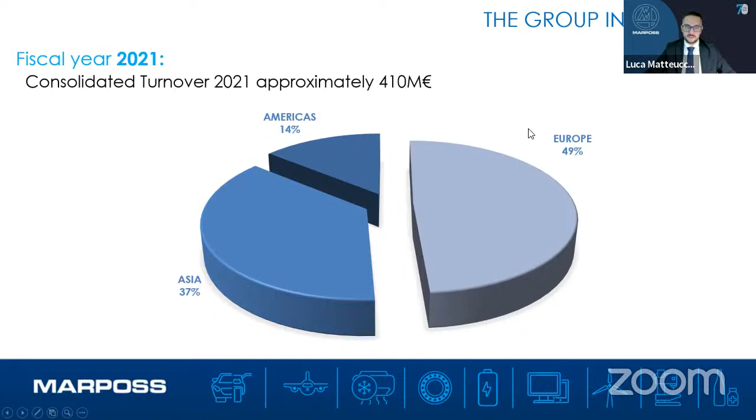How we are present worldwide, just to give an idea. The main sales and service organization centers are located in Germany, China, USA, Japan, and Italy, while the main manufacturing plants are in Italy, China, Germany, USA, and France.

Who are our end users, so how is our market divided? More or less, Marposs Group is working with two big categories. One is the system integrators, where we are supplying our application to machine tool makers and gauge and fixture makers. The other segment is the end users, so that could be automotive, aerospace, biomedical, glass, energy, 3C, bearing, electric motors, and compressors. So as you can see, we are in a very wide spectrum of fields, of markets.

Going a little bit more in detail about our product range, we are starting from the application for machine tools: grinding and cutting, forming, and stamping machines. In the matter of in-process gauges and touch probes, we are discussing part measurement during mechanical machining. We are able to provide in-process gauges and touch probes, post-process gauges to verify and assess if after machining the part is in tolerance and in line with expectations, and plugs for interoperational and/or final inspection.

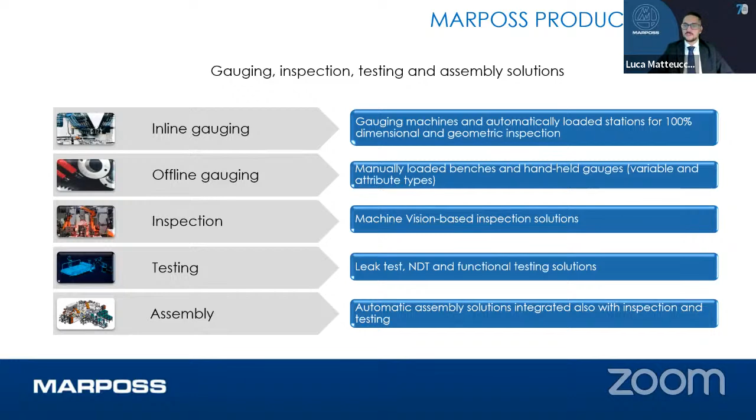We are also providing the testing. So what does testing mean? Leak test, non-destructive test, so NDT, and functional testing solutions. In the end, one of our latest and recent acquisitions gave us the opportunity also to enter the field of assembly, with automatic assembly solutions integrated also with inspection and testing.

Another important part of Marposs are the contact gauges, while my colleague later will give you a much wider and deeper presentation. Those could be electronic, air to electronic, or hard gauging; non-contact gauging, so shadow casting, reflectometer, interferometer, chromatic and confocal; vision systems with infrared and high resolution cameras; process monitoring, sensors and software, so position, force, vibration, and software as mentioned before.

The leak testing, that could be pressure decay, mass flow, mass spectrometer with a vacuum chamber and sniffer, and functional testing, so laboratory and end-of-line testing for e-motor and fuel cell.

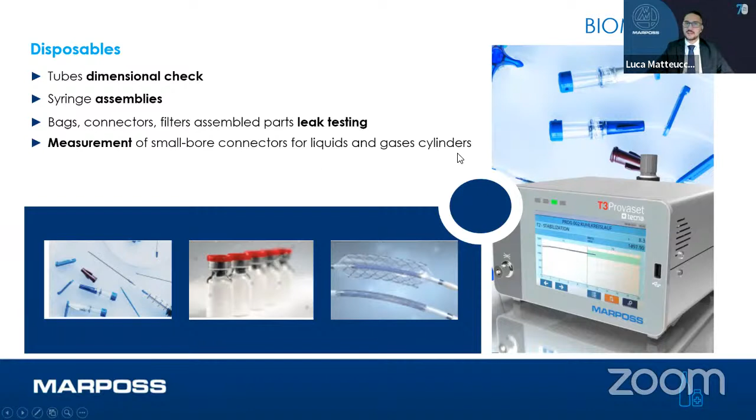Another market that is strategic for Marposs is biomedical, where with our products we are able to check, in the disposable field, tubes with dimensional checks, syringes with assemblies, bags, connectors, filters, assembly parts with our leak testing solutions, and also measurement of small bore connectors for liquid and gaseous cylinders.

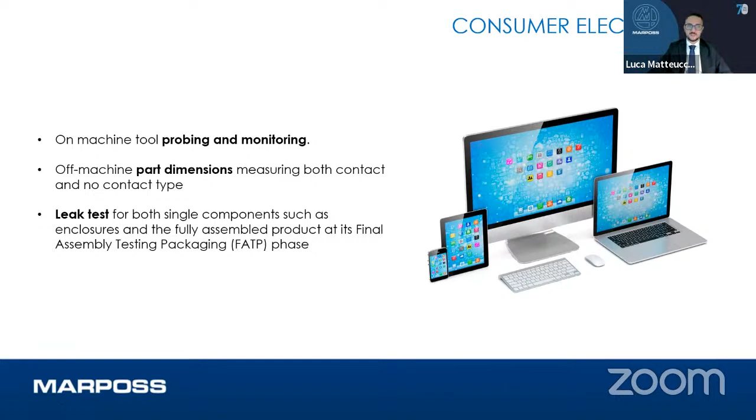In recent years, we have also invested a lot in the semiconductor sector, thanks to our strong knowledge of in-process solutions. So now we are also able to provide our sensor solutions for wafer processing: acoustic sensors to detect wire breakage and immediately stop the machine in order to avoid major damage, infrared sensors to control the thickness during and soon after wafer lapping, and contact gauges or non-contact sensors for tight control of the thinning in-process operation.

We are still obviously providing our applications for metrology and surface inspection, such as chromatic confocal technology, which is shown as the best solution for high-accuracy measurement. We provide different types of line sensors to obtain 3D images, and for microscopic purposes, 2D chromatic confocal line cameras are also available.

In aerospace, Marposs supplies precision gauges and tooling systems to aeronautics and space customers worldwide. These include fixtures, machine monitoring systems, and acoustic and automated inspection machines. Marposs solutions are used not only during the project, but also for the assembly, final inspection, and MRO of almost every modern aircraft engine manufactured.

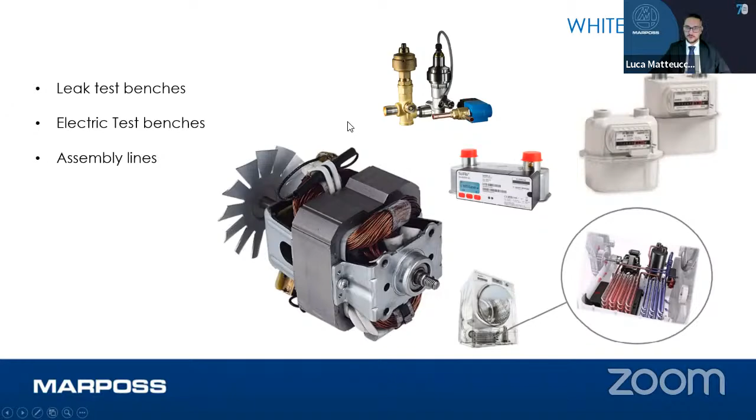Still in the sector more or less related to white goods, we are also specialized in applications for HVAC components, where we are able to support and provide solutions to our customers in air conditioning, industrial refrigeration, which could be chemical, pharmaceutical, and food and beverage, stationary and transport refrigeration, and domestic and industrial heating, with applications such as dimensional control tools and benches, leak test benches, electrical test benches, and assembly lines.

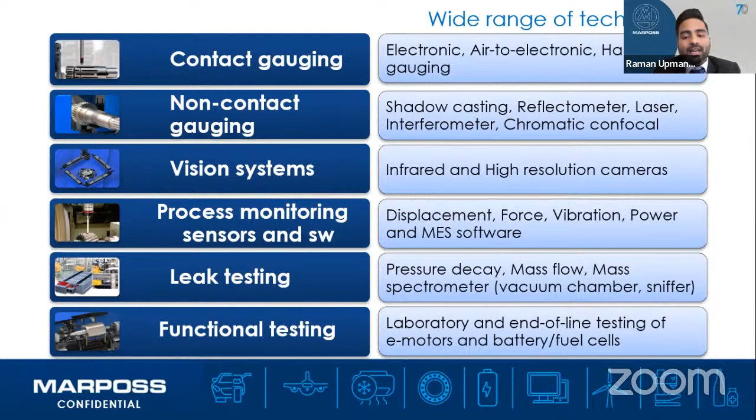In leakage testing, we have two types of systems available: helium leakage testing and air leakage testing. In functional testing, we have electrical testing systems for all components, whether batteries or electric motors, for laboratory as well as production environments. I'll start with the solutions we have for the electric motor industry. A motor comprises these child parts: rotor, stator, motor housing, cooling jacket, and the complete e-motor. Marposs has solutions to inspect and test these components.

We have the solution for the inspection of rotor, stator, cooling jacket, complete e-motors, and even the electrical and leakage testing at these child part levels. So the first solution which Marposs has for electric motors is OptoFlash and OptoQuick.

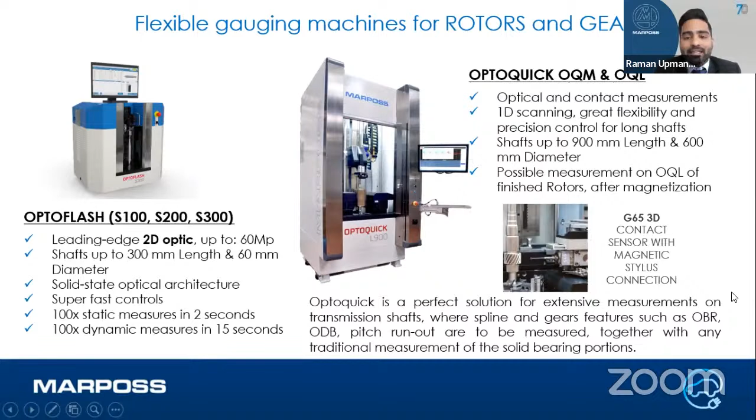We have the rotor shaft assembled inside the motor. So if anyone wants to conduct the dimensional measurement of rotor shafts without even touching the rotor shaft, we have an optical gauge through which we can conduct this measurement. Marposs is able to conduct any kind of measurement through this gauge, for shaft lengths from 100 mm to 900 mm. We can conduct OBR, ODB, pitch runout, and even dynamic measurements with this gauge.

The second solution we have is for stator assemblies. We have designed this flexible gauge, manual or automatic, that can be customized as per the customer requirement for hairpin stator measurement and inspection by laser scanning. We can reconstruct the 3D of the part through our software. External and internal diameters of the stators can be measured, as well as features of the isolating papers around the hairpins. So complete inspection of stators can be done through this solution.

Next, we have special contact gauging solutions for rotors and stators. As I explained in my previous slide, we have a non-contact solution for measurement of rotors. Now, if someone wants dynamic measurement through contact gauging, like measurement of multiple diameters, distances, runouts, and inspection of balancing holes with laser scanning, we can customize our solution.

For the stator, again, we have customizable machinery to measure IDs and ODs, and dynamic measurement of concentricity of external diameters with respect to the inner axis. We also have the possibility of automatic part loading and unloading, depending on customer requirement. Before moving on, I would like to tell my viewers that Marposs manufactures customizable equipment. We customize our equipment as per the requirements of our customers.

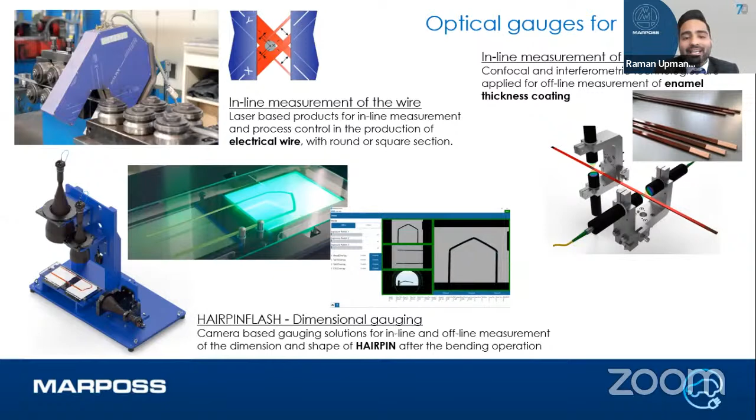There is a coating applied to the hairpins. Through our confocal chromatic technology, we are able to measure the thickness of the coating, which we cannot see with the naked eye. We have also developed dimensional gauging for hairpins to check whether the bending of the hairpin is being done properly or not.

Now, as I explained, we have solutions for testing as well. In testing, we have two types of solutions available: electrical testing and leakage testing. In electrical testing, we have a solution for every child part level. For stators, at end of line production, we have the stator testing solution available, with surge test, hipot, insulation resistance, and even partial discharge measurement.

For rotors, we have a quality control solution to check the back electromotive force inside the rotors. And we have the solution for complete electrical motor testing as per the industry standard IEC 60034. So you can see that Marposs is everywhere, Marposs is 360-degree. For stator and e-motor testing, we can provide our customers solutions for the laboratory as well as the complete production environment.

Next, assembly and leakage testing of electric motors. As I explained, Marposs has the solution for leakage testing. We generally do leakage testing with two different methods: the air method and the helium method. That depends on the defined leakage rate of the customer. If the customer wants to detect minute leakages, we can offer a helium leakage testing solution. And if the requirement is met by air sensors, we can provide the air leakage testing solution.

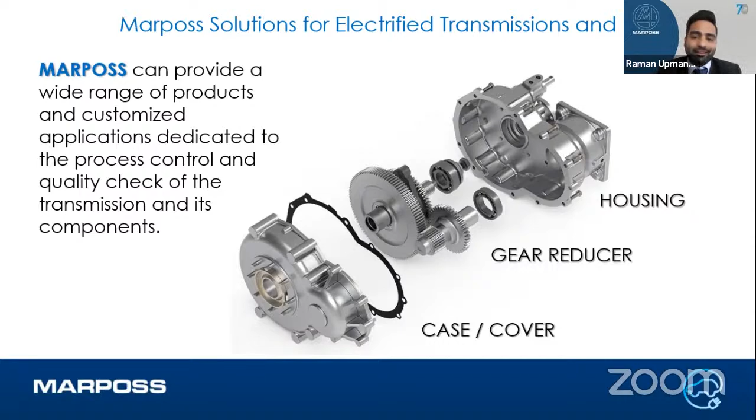Now moving on to the powertrain segment. As you can see from this slide, Marposs can provide a wide range of products and customized applications dedicated to process control and quality check of the transmission and its components. Mainly in the transmission components, we have three elements: one is the case, another one is the gear reducer, and the third one is the housing. So Marposs has a solution to inspect everything.

As you can see, for gear measurement, we can measure cylindrical gears, spur gears, helical gears, shaft gears, and internal ring gears. Any kind of dimensional measurement that is to be carried out on the gears, Marposs is there. We have a machine for shim determination and selective assembly. We have leak testing of gearbox assemblies.

I would like to draw my viewers' interest to this solution, since now we are moving towards electrification and the sound which was previously coming from the engines will be reduced, and the only sound left will be from the gears. So in order to minimize that sound, we need NVH testing, that is noise, vibration, and harshness testing, on the gears. Marposs is ready to support you with these kinds of solutions. We can provide customized solutions at the gear and complete gearbox level to ensure that gear noise can be reduced.

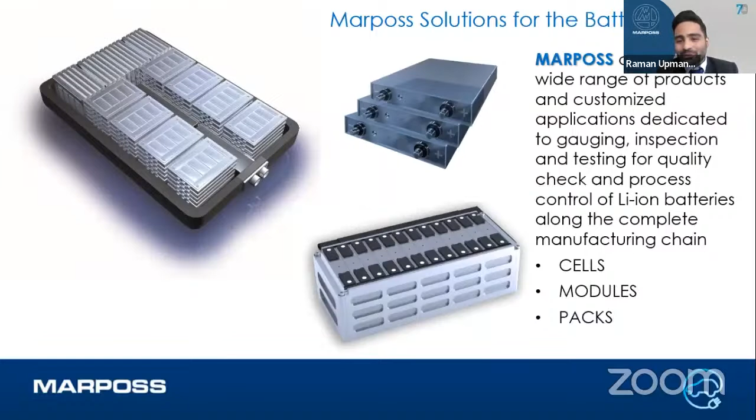Now moving on to the battery segment, we have solutions for cells, modules, and complete pack level. I'll quickly go through the solutions Marposs has for all these levels. We have gauging and inspection in the R2R process. Now we all know that the Government of India has issued a PLI scheme worth $2.5 billion in order to boost local manufacturing of cells. So Marposs has already designed its solution to support our Indian customers for cell manufacturing.

This is the process through which the cell is made. First rolling is done, then coating and drying, calendering, slitting, and separation. Marposs has solutions for every segment. During the roll-to-roll process, we have a chromatic confocal sensor through which we can check the thickness of the coating and even the thickness of the foil. We have a laser micrometer from our group company, which can provide the dimensions, basically the width of the coil.

This solution would be of a lot of interest for our viewers. Once the slitting operation is done, there is a chance of burrs forming on the edges of the roll. So Marposs has introduced a high resolution camera solution with two cameras: one is a matrix camera, another one is a linear camera, through which we can detect the size of the burrs. And I would draw my viewers' attention to the fact that Marposs is very well known for its precision, so we can detect a burr even as small as 5 microns.

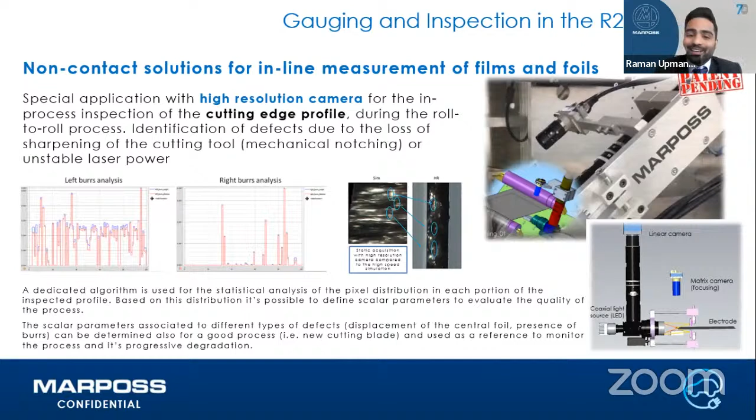Next, for the aluminum cases in the manufacturing of the cells, we have a solution to check cracks in the aluminum housing. This is completely non-destructive testing, done through eddy currents. Next, as I explained in the motor segment, we have leakage testing solutions for battery cells. Again we have two types of solution: one is helium, another one is air.

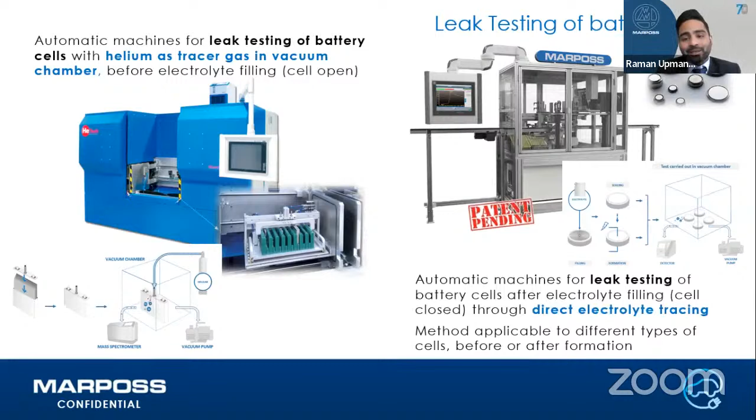And it is my honor to share one newly developed solution from our group company. They have done a lot of R&D. We can now detect electrolyte tracing. What I mean by electrolyte tracing is we can place the cell inside a vacuum chamber and detect the electrolyte coming out from the cells, in order to ensure that the cells now going to module and pack assembly are totally leak proof.

We also have leakage testing solutions for battery packs. There, we can check the cooling circuit through our air leakage testing solutions, and we have leakage testing with helium technology for the pack assembly too. Suppose the pack has been manufactured and you know there is a leakage from the pack. Now our customer wants to know where the leakage is, because if they don't know where it is, ultimately they need to reject the part. So Marposs has developed a technology to find the location of the leakage through our helium sniffing technology.

As in electrical motors, we do have an end-of-line electrical testing solution for battery cells. So Marposs here provides you one-stop solution. We can provide you the electrical test solutions like OCV, open circuit voltage, ACIR, AC internal resistance, DCIR, DC internal resistance, insulation test, and we can possibly integrate our leakage testing solution with this machine.

So what I want to explain is you don't have to have different machines. Marposs can provide you one-stop solution. This is really a great solution introduced by Marposs. We do have the welding and measurement of electrical resistance. So what I mean by electrical resistance, once cells are being assembled into the bus bar, they are being assembled through spot welding or the laser welding.

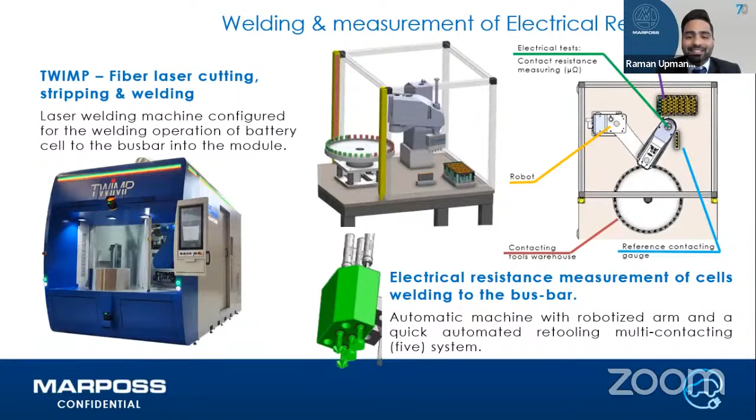So if we want to check the electrical resistance of that weld joint, Marposs has the turnkey solution, fully automatic solution and semi-automatic solution also, through which we can detect the electrical resistance of that weld joint. We have the capability to detect the internal electrical resistance from 3 microohms to 5 microohms.

Another solution which Marposs has introduced for electrical testing of battery packs. Now, as we see in our previous slide, we have the solution for cell level, now complete pack level. Yes, Marposs has developed the solution to have complete thorough electrical testing. When I was having a panel discussion 2-3 days back, I insisted on the quality of the cells and testing of the complete battery packs. So this is where Marposs can support you to have the testing, OCV, high-pot, pulse, DCIR, BMS writing, BMS data comparison, and possible integration of leakage test also in this solution.

Marposs is not only into the EV lithium-ion segment batteries. Marposs has seen the future now, and they have already developed few of their solutions for hydrogen market also. So we have the solution for PEM fuel cells components, that is proton exchange membrane fuel cell components. Marposs can provide the solution for flow plates and bipolar plates. We have the solution for catalyst coated membrane, gas diffusion layers, MEA, complete stack assembly, and hydrogen valves. I'll quickly explain about our solutions for hydrogen market.

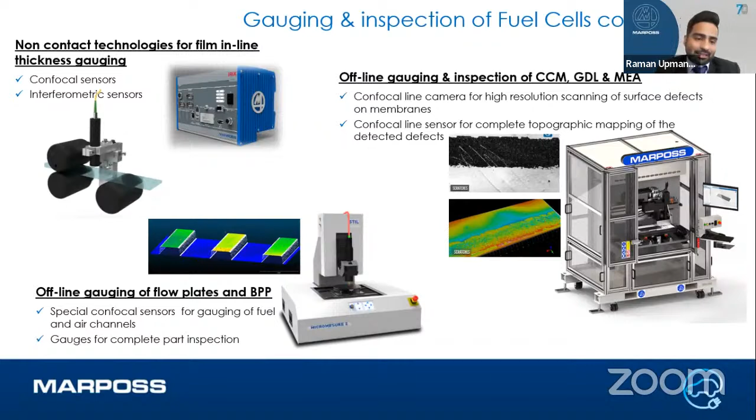Again, in order to have the thickness measurement of any roll, any foil, we are there to support you with our chromatic confocal sensors and interferometric sensors. We do have the offline gauging and inspection of CCM, GDL, and MEA. Again, confocal line camera, confocal line sensors for complete topography mapping of the defect. And we have the offline gauging of bipolar plates and flow plates.

Again, for leakage testing, for fuel cells also, we do have the leakage testing solution available. We can test 3 circuits on individual bipolar plates, and even we can check all the circuits on the stack assemblies. We have the high pressure valve testing equipment available. Helium leakage testing in vacuum chamber can also be done for the bipolar plates.

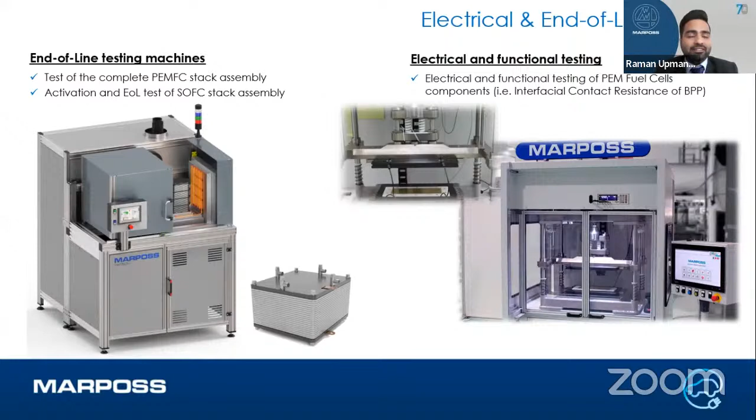Coming on to the electrical and end-of-line testing, we have end-of-line testing machines for full stack assembly, activation and end-of-line testing for solid oxide fuel cells, also stack assemblies. Electrical and functional testing, we have the solution for electrical and functional testing of PEM fuel cells components. That is, like we saw in lithium ion battery segments, we can measure the interfacial contact resistance for bipolar plates in fuel cells also.

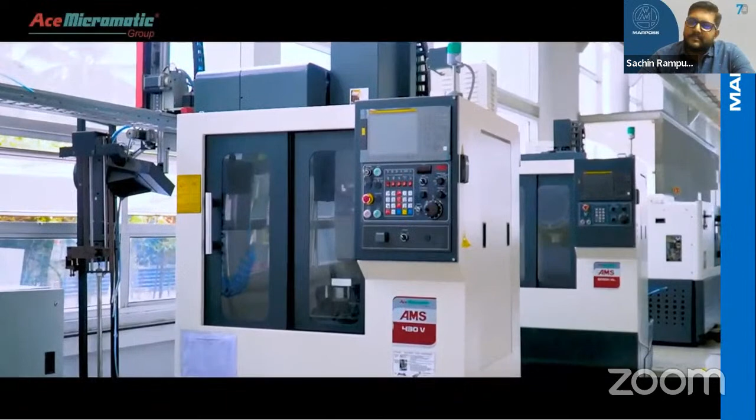So how are we going to implement them on the machine? It's a big question, right? So answering the ongoing problems or day-to-day problems at the shop floor, we would like to just give you a glimpse of what we offer to resolve the problems of the customers. Here is a joint video with Micromatic, which we have done to address all the queries of the customers. Any machining center, it might be vertical, horizontal, or a lathe.

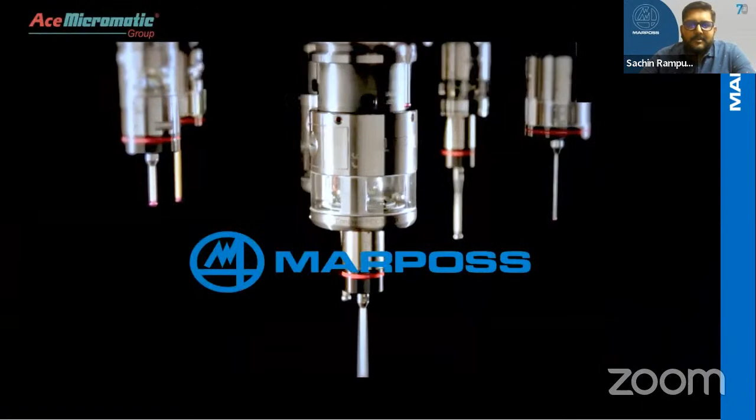So this is our tool setting solution, wherein we can measure both length and diameter of the tool, and also the axial breakage of the tool. And every product of ours is program driven on a CNC machine. As you can see in the video, you can measure both length and diameter of the tool. And this is a spindle probing solution.

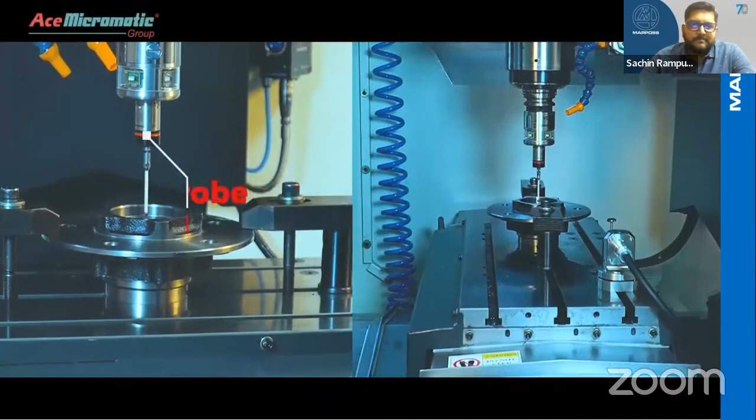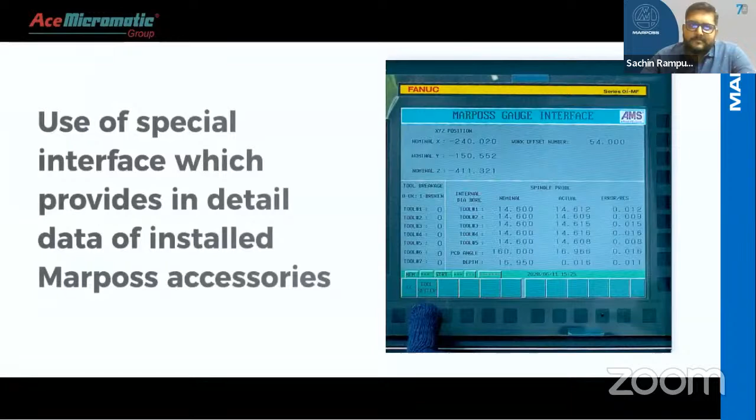So, optical receiver, we have radio ones also, but with optical we have the self-pairing mode, which is one of the uniqueness of our product. And we are available on both Android and iOS platforms with the option called Ready to Probe, wherein you can just use them to have easy programming inside the shop floor. So with all the OEMs, we can also develop a special interface to work along with all our solutions. So this is our fast tool breakage sensor.

So that's ACE Designers, or ACE Micromatic Group, which is all you need in machining, and we also are with them to cater solutions for the industry. And having said the philosophy of cutting machine tools, like the 4 steps of productivity improvement, the workpiece setup, which you just saw in the video, like earlier days, we used to use a puppy dial or a small dial to set up the workpiece inside the machine.

But modern days, we have a workpiece setup with a probe. It might be with optical or radio technology, wherein we can perform the first and the fourth step together. We can also perform the work offset on the machines and auto update them onto the CNC controller. And also we can measure the part with a similar kind of probe, and then we can also update the measured dimensions too. And secondly, with the tool presetting, as you saw in the video, it measured the tool length and tool diameter as well.

With contact type and non-contact type, we have both the solutions, and tool process verification by inspection of axial breakage with our TBD to the laser, wherein you can have multiple inspection points on a cutting tool. And that's a solution from our side. Just to have a glimpse about all our solutions on the cutting arena, as you can see, we have TLS, which is called tool length setter, which can help us to have the tool length detection inside the machine, and it also can detect an axial breakage of the tool in the event of breakage inside the machining area. And all these products have an ingress protection rating of IP67 or more.

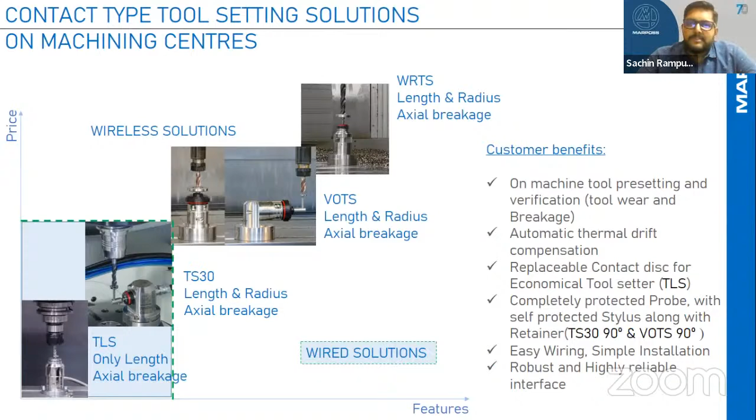And moving on to our wireless solutions, as you can see on the screen, VOTS, which comes with optical receivers or infrared transmission technology, and WRTS with radio transmission technology, wherein you can measure both length and diameter of the tools, and also the axial breakage. So having said about the contact type solutions, let's move on to our non-contact type solutions. With the help of TBD, as you saw in the video, it just flashes a laser beam, and for all kinds of round tools, it detects the tool breakage within 1 second. And even in case of through coolant tools, it might add an additional 1 second, but it's still a faster way to identify the tool breakage inside a high-speed machining center.

And the ML75, the laser technology, wherein we have a patented thing with our MIDA lasers called the air tunnel effect, wherein you can have the air blown whenever there is coolant on command inside the machine. Before we get into the machining area, we ensure that there is no dust, coolant or any sort of foreign particles in the measurement arena, so that we have a clean and green measurement with high accuracy of up to 0.2 microns. And this laser is very helpful to measure tools starting from 10 microns till 298 millimeters, which is one of the core strengths of our MIDA laser inside the machining area.

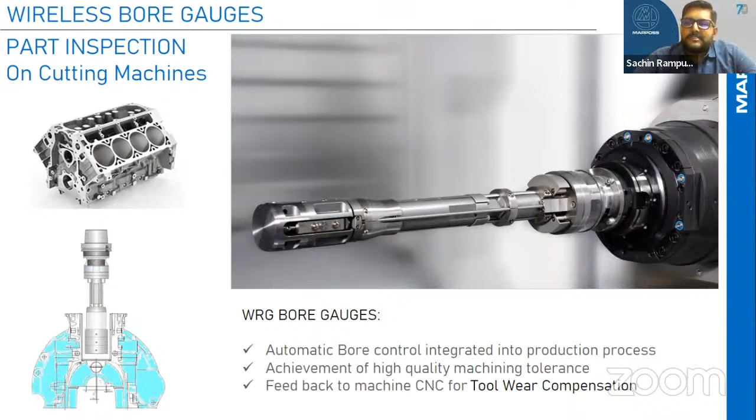So, we also have our special solutions for the automotive market, wherein we can measure the bores inside the machine, at multiple places, and then we can transmit the signals wirelessly with the help of our radio transmitter to the machine, and we can also give auto corrections to the boring bars too, if the boring bars are capable enough to take the correction. So that was a brief glimpse of our probing solutions in the machining area.

Moving on to our monitoring solutions, everybody will ask a first question: why do we need monitoring on cutting machines? If you want to detect collisions inside the machine, or tool breakage or tool wear, which are the common day-to-day pain points of any machine user on the shop floor. To detect all of them we have our dedicated solution, giving a 360-degree overview of the cutting process, and also addressing modern norms like IoT and IIoT. We have all the solutions for the machine tool industry.

Having said all of these things, every chip tells a story, as per the machining experts. And I would proudly say that we record it and visualize it for them, so that they have insight into what is going on inside the machine. We have a wide variety of sensor families: true power monitoring sensors, and a sensorless monitoring channel with our modern generation Genior Modular systems. We call it the heart of our monitoring hub, the GEM CPU.

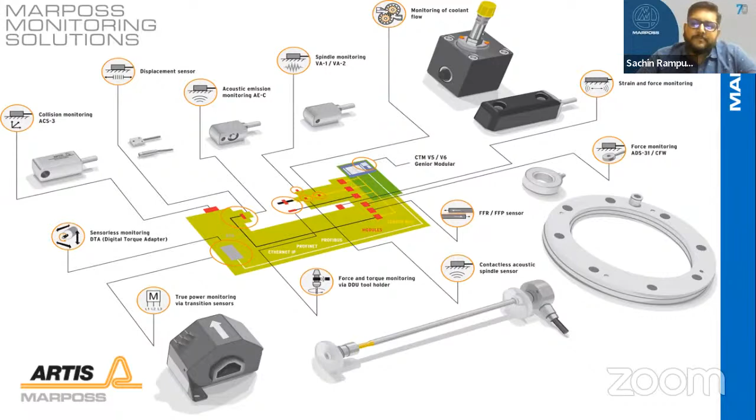We have different kinds of interfaces depending on machine varieties and controller capabilities. We have force monitoring sensors, acoustic emission sensors, coolant flow monitoring sensors, and majorly strain sensors, which are one of the biggest advantages in a machining area. So how do we do it? This is a simple glimpse on a turning center: how we monitor the process inside a machining area. You have seen the vertical machining application.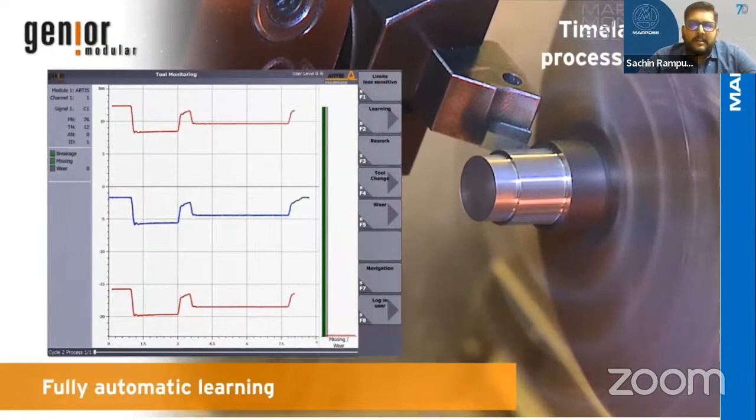So we can monitor all three axes in any sort of cutting machine in a fully automatic way. The green ones are the learning cycles, as you saw in the video earlier, and you can also see the spindle load and wear monitoring on the side in the bar graphs. Now we start with the upper and lower limits; the green is the plotted value and the blue ones are the current cycles. Now the limits are self-adjusting and automatically optimize themselves with the help of artificial intelligence. Thanks to Artis for developing such an intelligent system for the industry.

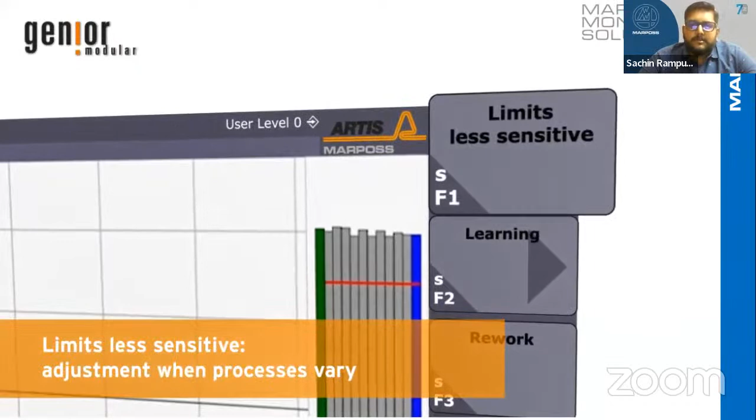The user has several options to reactivate the monitoring following an alarm. This is what the buttons on the right edge of the screen are for. These are the different options we have: you can make the system more sensitive or less sensitive, you can repeat the learning cycle, you can do remachining or reworking with the rework option, you can set temporary limits, and you can adjust the wear both manually and automatically. We also have multiple user levels.

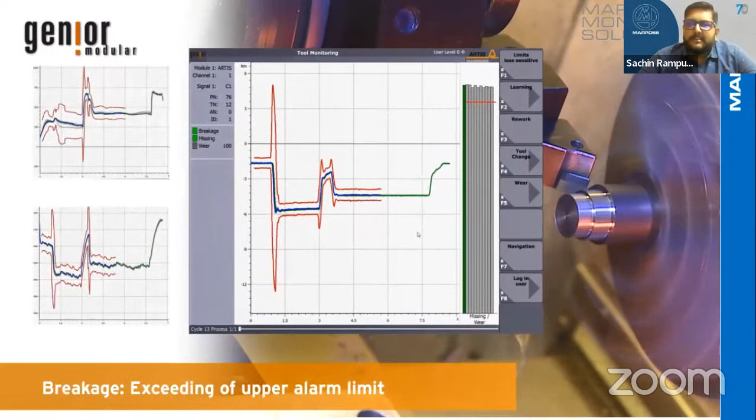How an alarm originates. Now you can see what happens when there is a deviation in the process. There was a slight chip-off of the tool, there is a deviation beyond the limit, and we stop the machine. This in turn helps us achieve better overall equipment efficiency in the machine area. Tool process monitoring. So we recommend having Genior Modular on all machines where you want to increase productivity or the OEE of your machines.

So having just gone through a video, now we have a complete portfolio of the Genior Modular solutions, as you can see on the screen. Initially with the strain and acceleration sensors, having the machine protection arena, and also the tool protection arena, wherein you have the distance sensor, the acoustic sensors, and we have multiple things which can be done along with our CPU module, and all these systems can be interconnected with the CAN bus, so that we don't need anything extra like an Ethernet cable to interconnect them.

And these systems are IoT compatible. They can be connected through the Ethernet port with a normal crossover Ethernet cable, and then we have IoT software of ours called C-Thru, wherein you can see the .csv reports of each and every process of yours, and you can see a trend report of the batch produced, and also an alarm report which has been generated in any machine in any event of the use of all the systems.

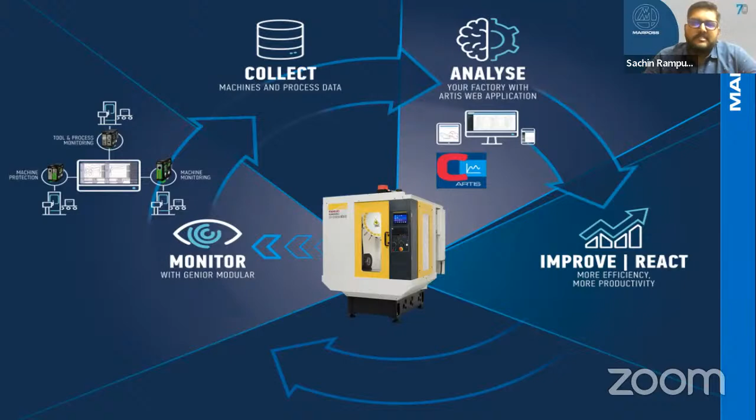And to have a cloud-based system wherein we do monitoring of a machine. We interconnect and we collect the data, we process them, and then we analyze through our software called C-Thru. So we are also IoT compatible as of today. And last but not the least, I would like to take you through one of the major or common problems which everybody in the industry faces, that's collision. What is collision to us?

Sachin, can you hear me? I think your voice has gone off the air. Sachin was talking about, he'll be back with us shortly. Great insights and great ideas on chips and the fact that every chip tells a story. Meanwhile, we'll wait for Sachin to join us. Meanwhile, I think we'll continue with the next presentation, and whenever Sachin joins us, he can complete the remaining presentation.

I'll focus on our segments related to casting and then stamping. These are the segments where a lot of technological advancements have been done by Marposs, and pretty much yet to be exposed or exploited by Indian companies to get benefits out of it. So we'll run through that. So we focus on casting, specifically light alloy casting. We'll be focusing on a parameter called die surface temperature and see how we can monitor that and reap the benefits during our manufacturing.

We'll also focus on the metal stamping process, where the focus will be introducing various sensors and monitoring the signals of those sensors to enable certain benefits, improve the productivity and have much better manufacturing going on. We start with light alloy casting. Here our focus will be machines which produce parts through the casting process. So the entire process is a machine. We got the tooling, which are the dies. We got the raw material, which is molten aluminum. All these together produce the parts.

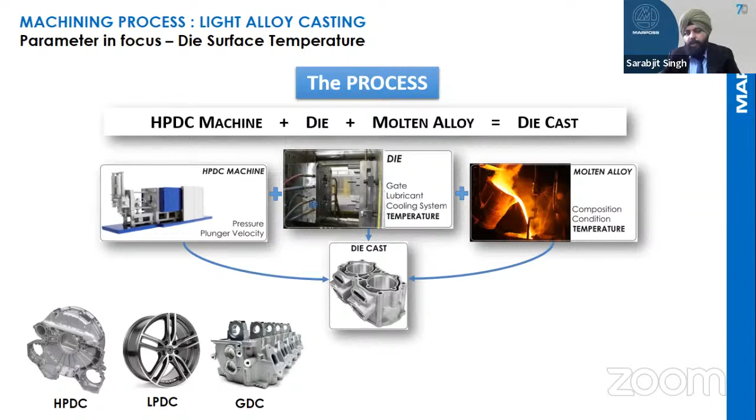The various components being produced are relevant with HPDC, which is high pressure die casting, low pressure die casting, as well as gravity die casting. So in all these processes, as the Marposs solution, we try to focus upon die surface temperature, meaning the tooling surface temperature, and see how important it is if properly monitored and what kind of benefits we can reap.

So the process in a casting machine is, you close the dies, you pour the molten metal, you inject the molten metal, the metal gets solidified, then the die is opened, there's ejection of the component, and there is spraying and blowing on the die. So if you see the entire HPDC cycle, almost 20 to 40% of the cycle time is the spraying and the blowing. If we are able to monitor the temperature of the die, this can be drastically reduced. A drastically reduced cycle time leads to more productivity in the existing setup.

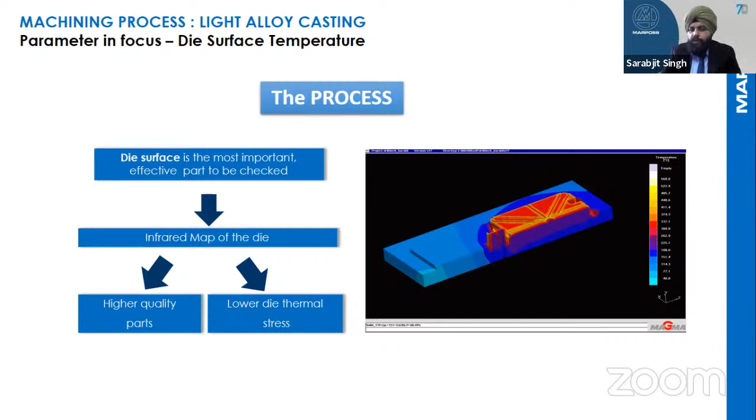So the main emphasis comes on the die surface temperature, which pretty much is not checked as a part of the machine. The die itself is monitored with respect to the temperature, but not at the surface. The entire surface temperature is mapped through thermal imaging, with which we are able to ensure higher quality parts, as well as, very important, that with proper monitoring the die undergoes very low thermal stress. This will ensure the longevity of the die during the entire production.

So if the temperature of the die is not properly maintained, what kind of issues or defects add up? We end up having part defects. Part defects primarily mean misrun, hot cracks, gas porosity and shrinkage. These are the real world problems, and all these are relevant to the die surface temperature being maintained. The die surface temperature, if not properly monitored, can lead to thermal stress and cracks in the die, which will reduce its life. And the die is one of the most expensive tooling for any manufacturer in the casting industry.

So how do we implement it? We have our solution, which is Total Thermal Vision, abbreviated as TTV. This solution comprises thermal cameras and dedicated software. There are two thermal cameras installed along the die casting machines. We take the image of the fixed die and the image of the moving die, compare these images, and then we are able to monitor the temperature.

Before spraying and after spraying, we compare how the temperature distribution is happening on the die surface. If it is uniform shot after shot, meaning after each component is produced, we are pretty sure that we are able to control the process, maintain it properly, run the dies for their intended life cycle, and produce parts with the least possible defects. So in short, the optimization of the casting process depends upon measuring and monitoring the die surface temperature.

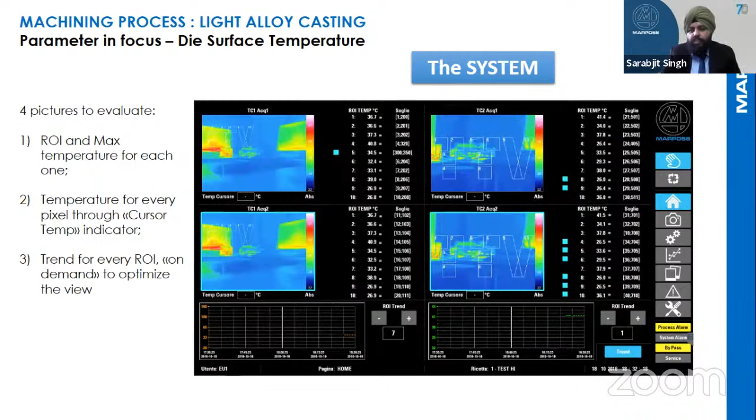Further, these are a few snapshots of our solution. You are able to see the temperature images, the thermographs rather. In all these images, we can identify certain key points which we need to monitor. All these points are stored as temperature points, available for analysis at a later stage. With all these temperature points it is also possible to have a trend.

In case there is a gradual shift or change in these temperature points, we can generate alarms and warnings. This will be a precursor for the operator to intervene, understand where something is going wrong, make an intervention during the manufacturing process, and get the whole process back on track.

And last but not least, these images are available to compare, in which you can see what the ideal image should be while casting, and what the current level of images is. With this comparison, we are able to literally understand where we are shifting, where we are perhaps going wrong, or whether we are producing parts with excellent repeatability. All this was not visible earlier. Now these are all tangible deliverables available with the TTV solution of Marposs, and these are the benefits a customer reaps.

Without TTV, it is pretty much a massively man-skilled process. They try to achieve optimum and stable cycles and try to understand a certain warm-up time. And there is also certain scrap you end up producing to get the die casting machine through the optimal warming cycle. Whereas with TTV, everything is taken care of by the system.

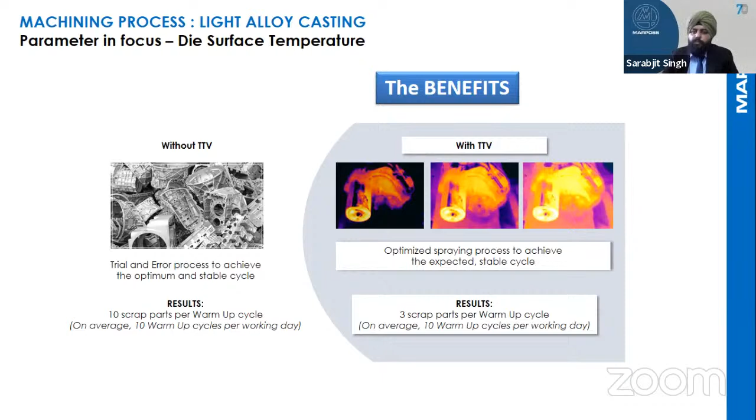They can optimize their die design for future designs, in order to produce dies with the least possible thermal stresses.

Moving on, let's focus on what Marposs is introducing for the metal stamping segment. This is a very, very vast field. This goes beyond automotive, a lot of critical components, or even the basic beverage cans, the aerosol cans we have, they're all produced through the metal stamping process. These processes, if properly monitored with certain key parameters, derive massive benefit for these producers.

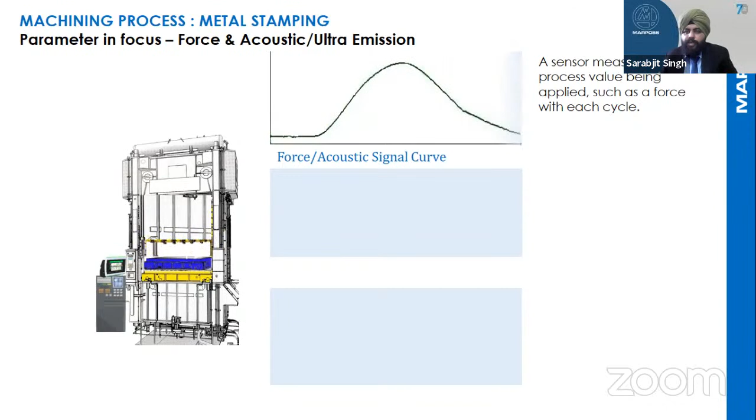So we're going to focus here primarily on two parameters. We're going to focus on the force in the metal stamping process. We're also going to focus on acoustic emission signals. We're going to see what exactly we mean. So essentially, we will have a sensor inside a stamping machine, with which we are able to generate a force signal. Then the process monitoring solution from Marposs is able to understand that signal and put limits to it.

And once these limits are set with respect to the production, we are able to see where we are going out of the range, and we can generate an alarm, or we can even stop the machine in case there is a massive variation in the signals. This is the simplest explanation, in layman's terms, of what exactly Marposs does for the stamping process. But there are immense technicalities and complexities in it. We're going to cover that in the next slides.

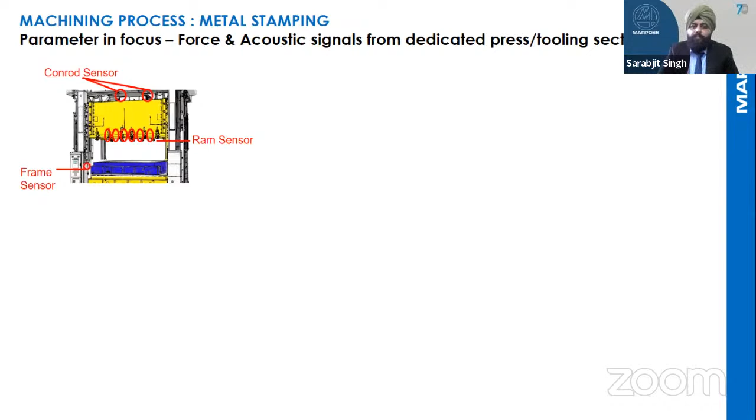So what we speak about, these are sensors. The sensors can be installed in a stamping machine at various positions. You can put it in the con rod. You can put it in the ram. You can also put it on the frame. And further down, you can also put these sensors into the stripper plate, inside the tooling, inside the hard plates. The idea of putting these sensors in the machine is to identify certain defects or process variations, which can be captured, and we can optimize our manufacturing process.

So once we put a sensor in the ram, we get an overall universal load of what is happening in each stroke. But if we put the sensor inside the tooling, in the stripper plate or in the hard plate, we go down to each and every operation. If it's a multi-stage tooling or a single-stage tooling, we are able to monitor each and every process, be it blanking, drawing, coining, piercing, or trimming. You're able to understand if there are any process variations happening.

A process variation will most likely produce a defective part, and a process variation happening over a long period of time will end up damaging the tooling. So all in all, it will be captured in real time. And the real-time outputs are available for the machine and the operator to take actions and stop the machine or sort out just the bad parts.

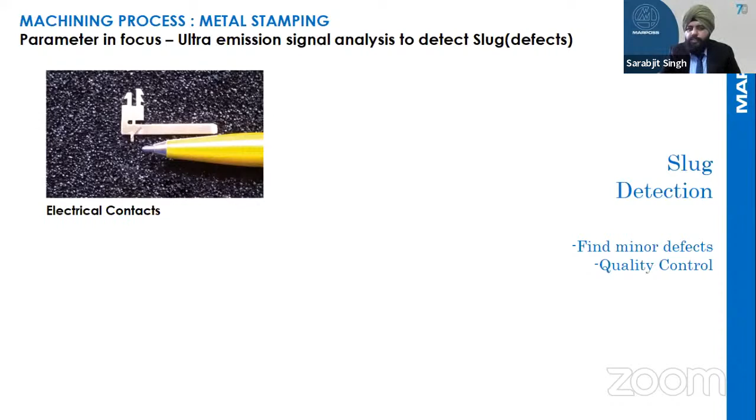We focus on acoustic emission signals to identify slugs. This is absolutely very critical. The parts being produced in stamping are massive. There are electrical contacts, which are very small parts. There are laminations, the essential part of any electrical motor. There are big automotive parts like cylinder gaskets or even structural parts.

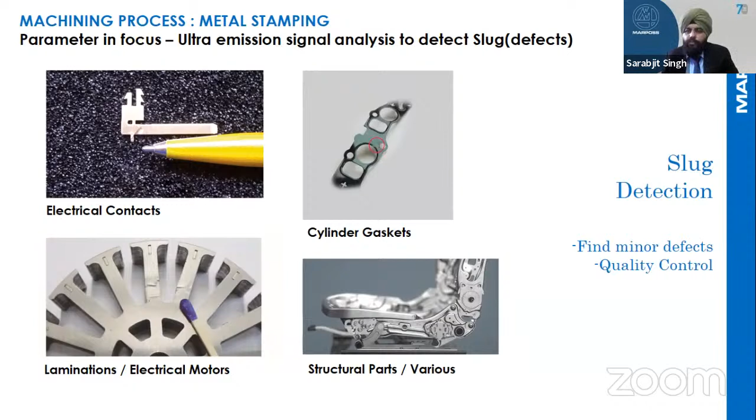All these parts, in case there are any variations of the force while the stamping operation happens, will have defects. And these defects are usually not captured till they reach the quality or assembly stage. It is possible with acoustic emission sensors provided by Marposs to check them in real time on the machine itself and either sort out these bad parts or even stop the machine and correct it if some correction in the tooling mounting has to be done.

Further, putting these sensors also eliminates the need for a dedicated, massively trained workforce or experienced people, because these sensors will ensure that the machines are always set optimally. How do we do that? We have a sensor inside the machine. So once we run the machine during the warm-up phase, we see what kind of signal curve is coming. We further see that in a stamping machine, a typical construction involves the tooling, as well as stop blocks.

There shouldn't optimally be any contact with the stop blocks, because we are consuming more energy which could be available for running the machine more efficiently. The operator here is not able to understand if any stop block is taking force, but with the process monitor and a force sensor inside the machine, they will be able to see that. So if they see a stop block force being generated, they can further optimize the setting and see the process result. This can be further optimized to achieve the best possible setup of the machine.

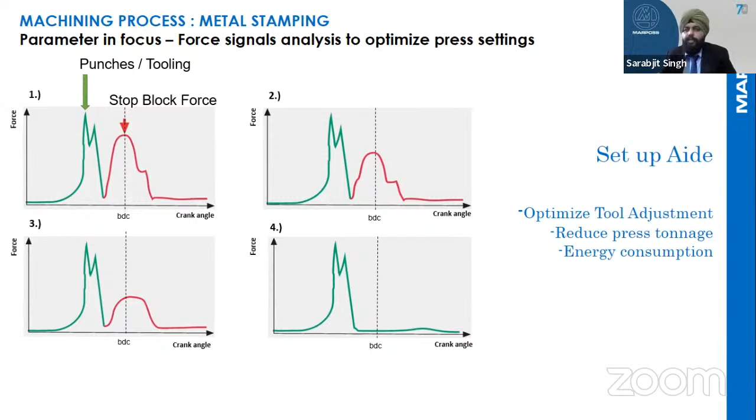This will ensure that the tooling is run properly. We produce the parts in the best possible manufacturing conditions, and we run the machine very optimally, so that the press is doing what it's supposed to do, manufacturing parts by stamping, but not producing abnormal forces, which lead to more maintenance costs and more downtime of the machine. There's a further possibility of using these sensors to improve productivity.

How? Because we are quite wary of running the machine at its optimum condition, and run it with a safety factor instead. But with these sensor signals inside the machine, the operator is able to understand what force level is being produced. So they can speed up the machine to see what force level signals are being produced, and reach an optimum speed of the machine where the force signals are produced uniformly, as they should be in an optimal cycle.

This will ensure that the machine is run at optimum speed, not at reduced speed out of uncertainty. So the operator doesn't go blindly in producing parts on the machine. They can run the machines with these sensors and the process monitor at the best possible speed, which means massive improvement in productivity. And more than that, you also use the tooling in the best possible conditions, so that you get more life out of the tools.

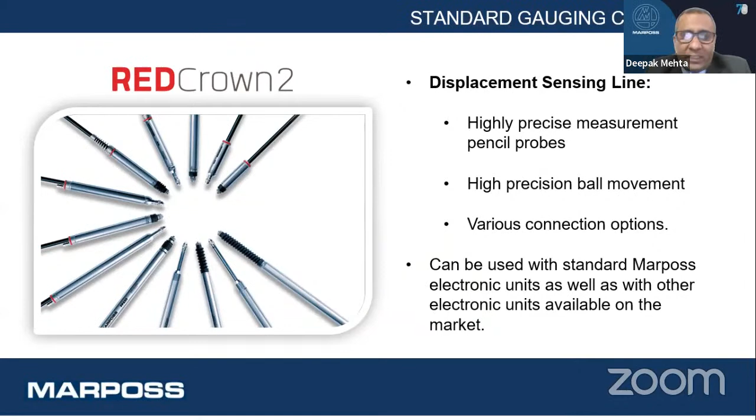Starting with the standard components, the LVDT transducers, which are very standard components for us. They come standard with spring push, pneumatic push, and vacuum retract options. And they also come with soft touch for glass applications.

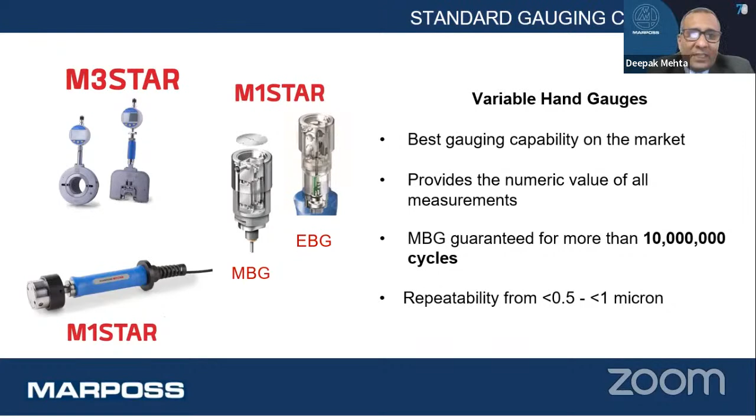And they are with the LVDT probes and half bridge transducers, plus there are the digital probes as well. Then we have the standard bore gauges, M1 Star gauges for the bore ID, and then we have the M3 Stars for the OD applications, with the mechanical bore gauge and electronic bore gauge. The repeatability of these bore gauges starts from 0.5 to 1 micron, and we guarantee 10 million measuring cycles as far as the life of the contact part is concerned.

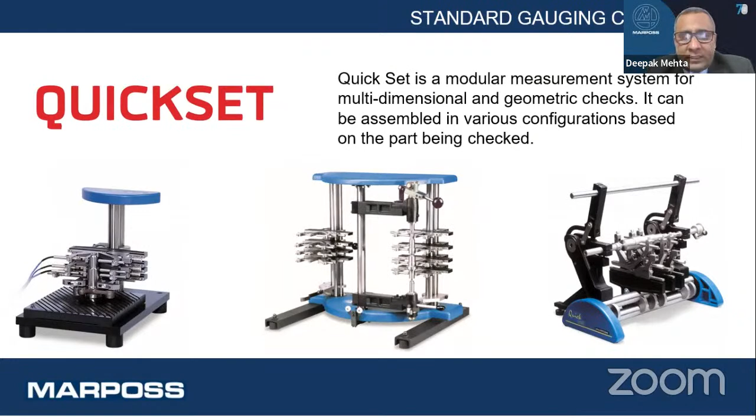Then we have the bore gauges with Bluetooth transmission, and we have the local display available. So we get rid of the cables, we can have the local display, and we can save the data on the PC. The PC has the software, and we can do the data analysis at a later stage. We have the standard dial indicators, column type displays, quick read, very small displays, analog plus digital. Quick set benches, which are very retoolable, and they can be vertical setups, horizontal, and so on.

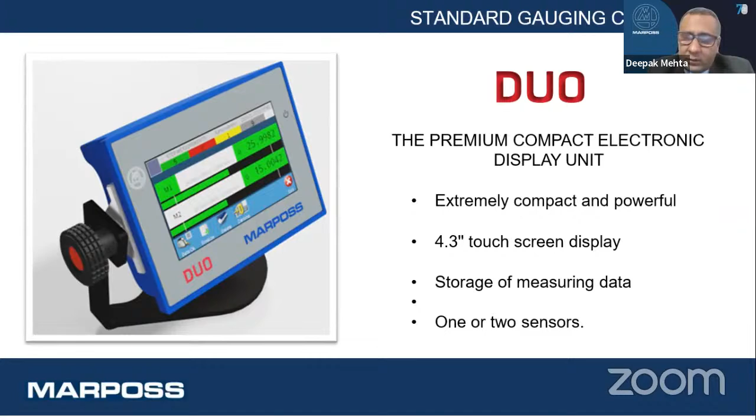We can also integrate Mitutoyo or some other third-party instrument so that the complete application will be there. So we have the amplifier boxes, and these amplifier boxes can be connected to our PC and the software. So we'll use not only the Marposs gauges but also external ones, like simple calipers and so on. Then we have display units, starting from the very simple 4.3 inch display unit for Duo, where we can have a couple of sensors connected and small graphical displays. Then we have the bigger displays where we can use more transducers. We have the Nemo and the Merlin displays where we can connect up to 16, up to 32 transducers, different types of amplifiers, and the Digicrown boxes for connection with the Digicrown digital probes.

The Merlin Plus is another platform for the electronic unit where we can have the graphical display of the component, and we can make a guided sequence program, which can guide the operator one by one through the inspection. You can also connect scanners if the part is already marked with a serial number, so we can scan the serial number and store the measurement result against it for future traceability. Our complete integrated industrial PC covers everything from manual benches to automatic applications. It has the Windows 10 platform, and it can also send data to the MES servers for integration and so on.

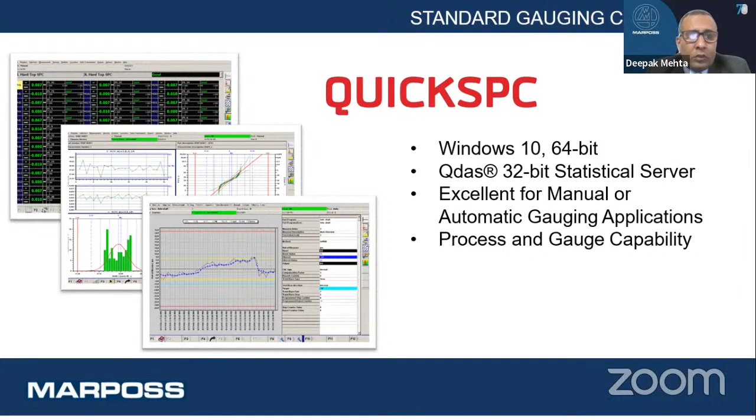Our Quick SPC software does the online SPC analysis for the process and gauge capability controls, used for all applications, from manual to semi-automatic to fully automatic. We can have customized fixtures, customized standard fixtures, manual gauges, dog houses. Dog houses are where we want to check the component without a variable: we put the fixtures and check with go-no-go gauges as well as handheld variable gauges. A complete solution where we have the gauge table with all the plugs, the PC, and everything is guided. You have the part, you have the barcode scanner, and you do all the inspection at one gauge station.

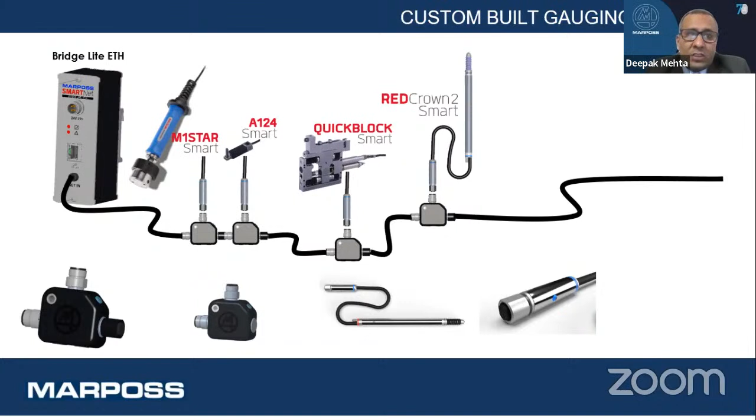Then we are also going ahead with this new technology that we have. We use one cable, and it is called SmartNet. In SmartNet, we can connect all the different varieties of transducers, like the bore gauges, the A124 transducers on some quick set applications, some quick blocks, some probes. So it carries everything in one cable only, and the management of all the sensors at one station will be very nicely organized.

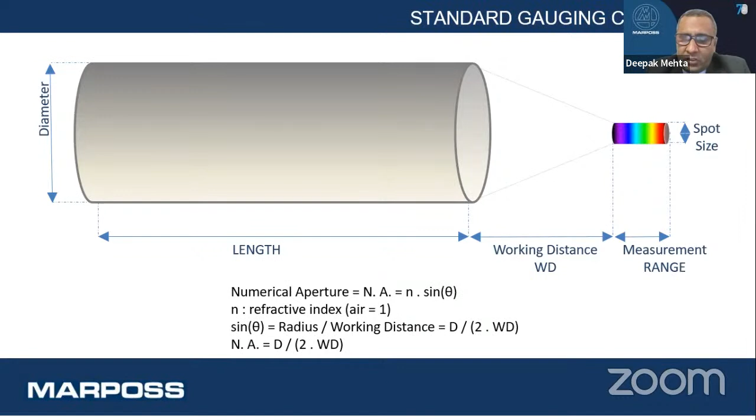Then we go to the technology called non-contact chromatic confocal sensors, which are based on the rainbow, on white light, and where we have different kinds of sensors. We can have point sensors, line sensors, and the electronic units which will be connected to these displays. So we will have this kind of optical pen. Then we have some working distance and the measurement range in which we do the real measurement. We can check practically any kind of material, whether it is glass, ceramic, or metal. We can check distances, thickness, and roughness of more than 17 nanometers.

And we can do also the inspection. Inspection means if it is a small area, some chamfer is there or some size is to be checked. So we can do also the inspection with this technology as far as the part is concerned.

Then we have a different application, putting the sensor on the gantry type of axis for the portico. Then we have a small 3D coordinate measuring machine. So it's a micromeasure where we put this sensor, and we put the part depending on the dimensions that we need to check.

Then going to the customized solutions, we also have the bore gauges, which are used on the transfer lines. Transfer lines means giving the feedback to the machine tool. And these kinds of gauges are mainly for the feedback to the boring machines, honing machines. So these are the gauges used on the machine for the post-process feedback.

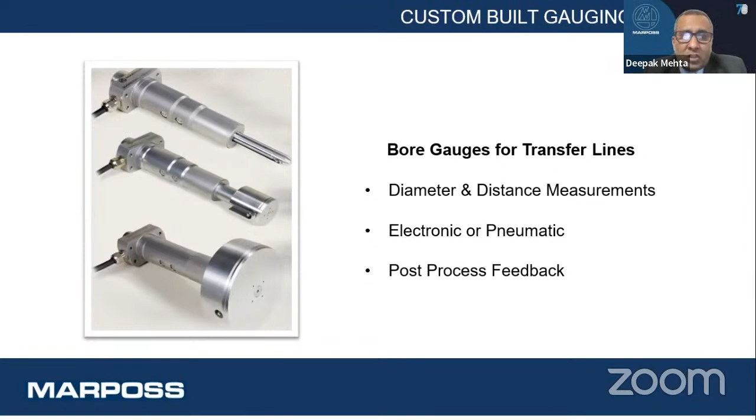And these are equipped with air cleaning arrangements. These are equipped with part temperature and ambient temperature compensations, and so on, so that we give the feedback on the machine tool itself.

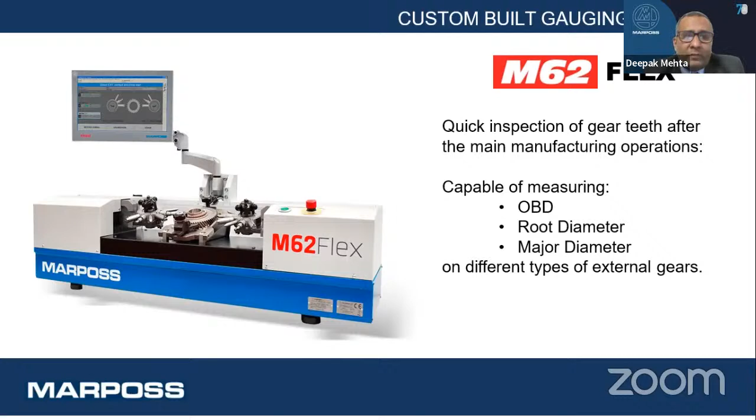Then going to the inspection of the gear, we have this kind of flexible gauge, which is used to check the over-ball diameters, root diameters, major diameters, which are the basic inspections. And this is completely flexible. The gear can have an odd number of teeth or an even number of teeth. This is completely adaptable, starting from the small size, going to the bigger size.

So here the gear is rotated at 3000 RPM, and the torque is varying from 0 to 40 Newton meters. So we keep the constant speed, and we increase the force and the torque, and vice versa. We keep the constant torque and we increase the speed. So we basically simulate the real condition of the gear, and then we check the parameters related to the NVH.

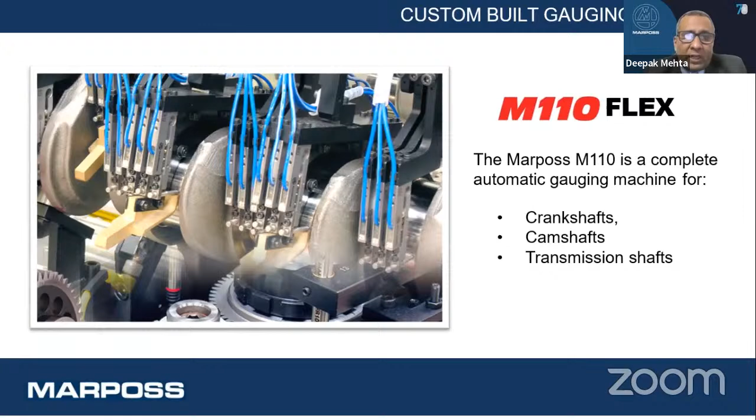We have also the flexible machines, contact type of flexible machines for checking the crankshafts, camshafts, transmission shafts, which are the important parts of the engine.

Another technology is the eddy current technology to check the cracks and porosity in the component. So we have different kinds of eddy current probes, and we induce the eddy current into the component. We keep a very small gap between the component and the probe. Then eddy current is induced into the component, and we read back with the change in the frequency whether there is any defect present in the component or not.

Basically, it is for the casting, as well as if the component is like the engine block, and we want to check where the piston is moving, because the piston bore is very, very important, and there is a need to check whether there is any porosity or not. We can check porosity as small as 0.5 millimeters. So very, very small porosity can also be checked with this kind of gauge.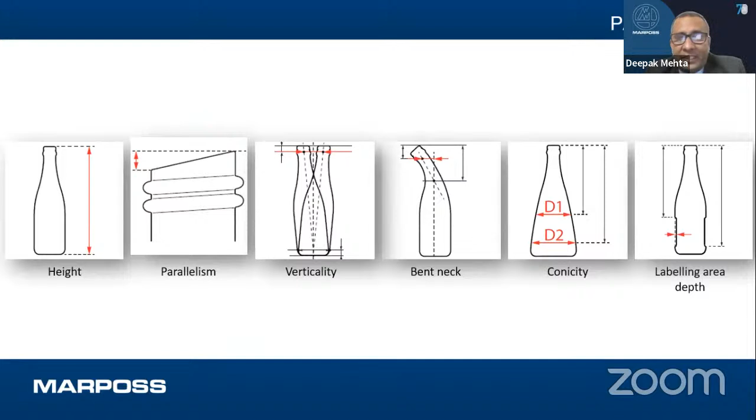And for this application, we use different kinds of cameras. We use different kinds of sensors for the checking of ID. So basically the parameters like the height of the bottle, the parallelism, verticality. So all the shapes that are important from the container's point of view, we can check with this VisiQuick solution. We also check the weight of the bottle, which is also very important. We also check the bulge on the bottom of the bottle, which is an important factor from the stability point of view.

Then we have the optical technology based on infrared rays, based on the shadow cast principle. So a camera is there, one emitter is there, one receiver is there. Whenever the emitter emits the infrared rays and the component comes in between, it casts the shadow on the receiver, and based on the number of pixels highlighted, we are able to tell you the exact diameter. And then this fork is placed on a vertical slide, which is equipped with optical encoders, and based on the linear scale, we are also able to tell you the diameter, the distances, and all these kinds of parameters.

Then we have also developed one gauge called OptoFlash. So as the name indicates, it is completely a flash. There is no vertical Z movement. It is not even one ray of light. It is an array, X and Y array of light. So we have different versions. 100 millimeters is the size of one camera, so 100 millimeters can be checked in one go. If the component is to be checked in static mode, we just need a couple of seconds, and if we need to rotate, it can be checked in 10 to 12 seconds. We check all the parameters. And I have a small movie to show you about this OptoFlash.

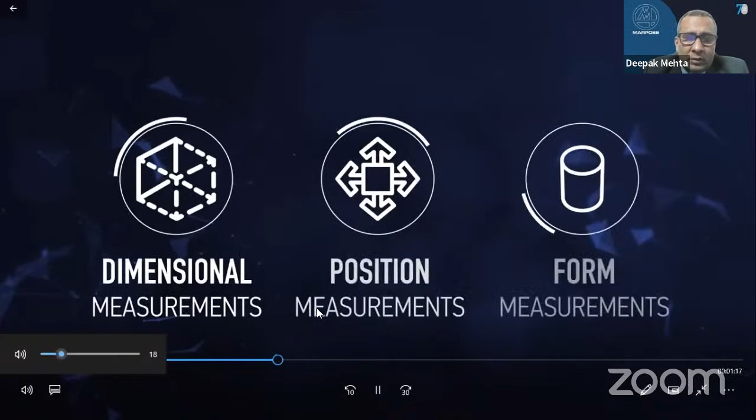So basically all the parameters like cylindricity, parallelism, flatness, coaxiality, even the cam profile. We also check the cam profile with the optical technology, but we can check only the convex, positive profiles, because it's based on the shadow cast principle. So different kinds of models, starting from 100 millimeters going up to 1200 millimeters. We can also develop extra large machines for dimensional, position, and form measurements. Any kind of component can be checked here.

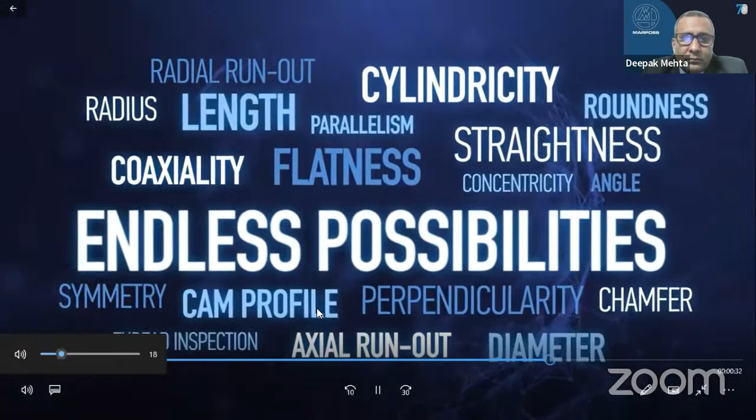So the part can be a very small screw. It can be pushed on the customized bottom center. The interface is very, very friendly. You can do the programming, you can enlarge the area, and then you can select which parameter you want to check. It's very user-friendly programming. Part loading, the part type change, the correct tooling indicators. So basically it's a completely flexible solution. Any kind of shaft can be checked. Today you are checking the camshaft, tomorrow you can check the transmission shaft and so on.

Okay. So now moving to a different field called leak testing. Basically there are a couple of types of leak test. The basic leak test is the bubble test in water: if there is any leakage, we can see the water bubbles coming out. Another one is pressure decay. We put air in from one side and we check the pressure decay from the other side.

And if it needs to be checked very precisely, we have helium. We induce helium into the component, and then there are different tests like the vacuum chamber or the sniffer test. We put the part into the vacuum chamber, and based on the helium molecules that leak from the part, we can check with the spectrometer and tell you the very small leakage. So it depends on what kind of leakage we want to check, for example starting from 10⁻³ millibar liter per second, going up to 10⁻⁸. 10⁻⁸ means a very small leak.

Just to give you an example, if we have air conditioners or refrigerators, and there is any leakage in the condenser, which is 2 grams per year or 1 gram per year, such a small leak needs to be detected, because the quality of these products has to be at a certain level. And other applications are like checking radiators, evaporators, condensers, AC hoses, alloy wheels, and so on.

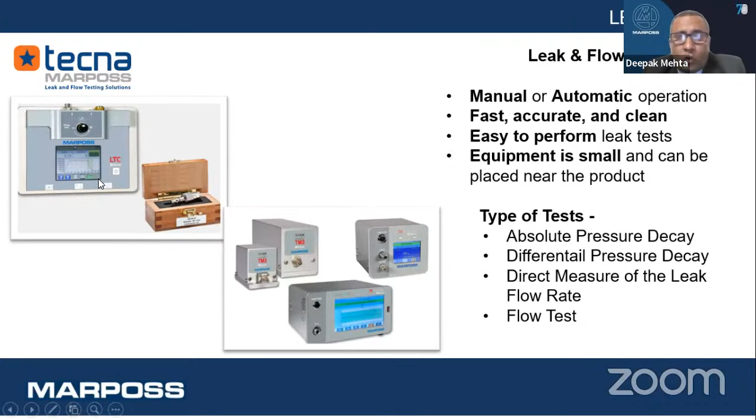Then we can also do the leak test complete assembly. Leak test assembly means a complete application where we have to check the leakage of all the circuits. Just to give you an example, in the cylinder block we have to check the high pressure oil circuit, low pressure oil circuit, blow-by circuits, water jackets. All these need to be checked during the process itself, like when it is intermediately ready or at the final inspection.

And not only the leak test; usually these machines are also combined with assembly line applications, where you have to do the cup pressings. For example, in the cylinder head, you have to do the cup pressing, you have to tighten the screws and all this kind of stuff. So it is a final assembly line application.

Then the helium I have already explained. Basically with helium, you can check fuel tanks, AC hoses, and everything. And not only this: because helium is quite an expensive gas, we also make helium recovery systems, which are connected to the helium machines, and 85 to 90% of the helium which is not used, or which is left over, can be recovered with these helium recovery systems.

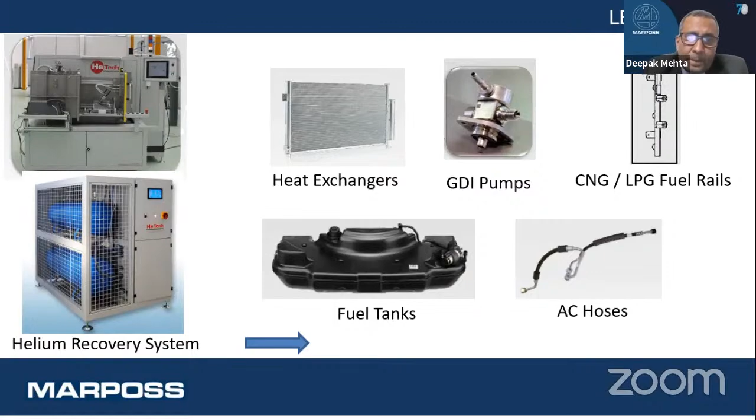A small movie for the helium. This is made by our helium company, which is near Milan in Italy, our group company. This is a double chamber machine for saving cycle time. Part loading can be done manually, and after the loading of the parts, the connectors are manually aligned.

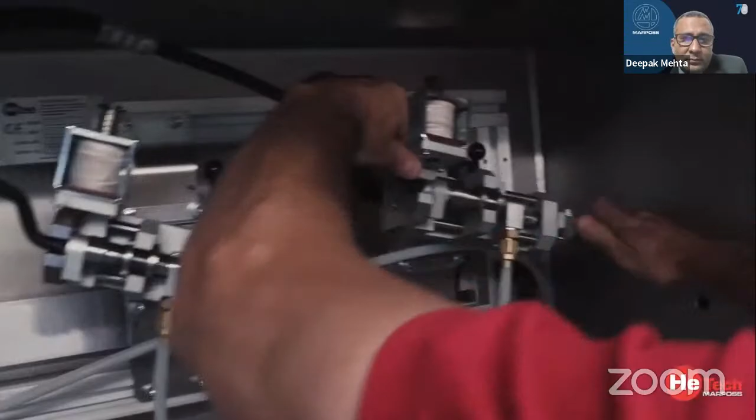Start the cycle, then the door is closed and vacuum is created. The size of the machine is very big, depending on how big the AC hoses are. The test pressure is 40 bar, but we have also made machines where the test pressure is more than 200 bar. Cycle time is 72 seconds, so in 72 seconds we can check two parts.

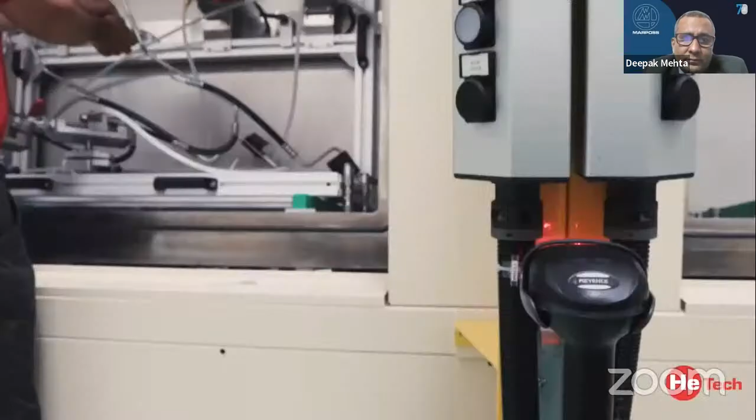We can commonly use the spectrometers, and the vacuum systems and everything are shared between the two chambers. It is also making the punch: if the part is good, they make the punch. And also the barcode is generated, so we can physically put the barcode for traceability. This can be detected, what part we have checked, and it is recorded for future records.

So the part is okay and approved. This is how the overall machine will look. The two chambers of the machine, then the electrical cabinets on the back side, the printers, and here is loading and unloading. The operator can load on one station and start it, and in parallel he can load on the second station and so on.

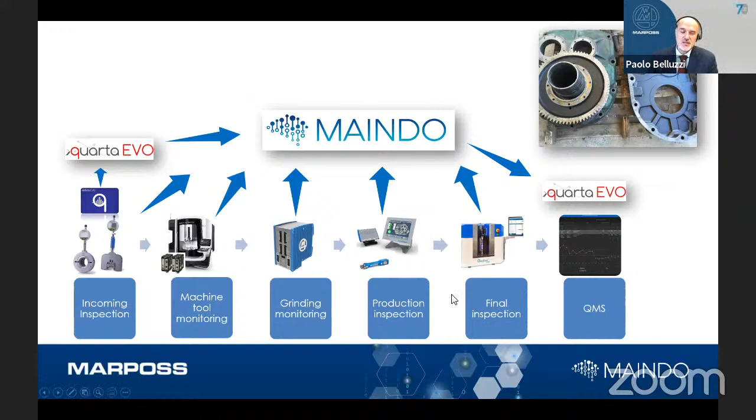And this is where Maindo was born. By the way, just for your information, Maindo is the way that our Japanese colleagues say mind, the Japanese translation of the English word mind. Maindo was born exactly for this, in order to collect information coming from monitoring systems, measurement systems, testing, and enterprise software. And combining all this information, the target that we have is providing what we call the total quality for our customer.

Because having data stored all in a single position, that could be a database, or, as we will see, a cloud storage, will provide our customer the opportunity to understand better their own production, their own process, and, as we will see very soon, what are the correlations between every single step of the production.

This is really an important point, because our customers are always trying to improve their own process. And the opportunity to understand the connections between any steps of their production is a key factor in order to improve their production. So

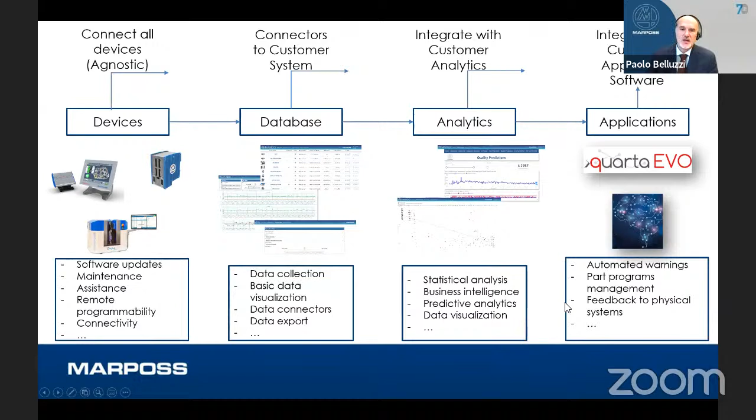This is just to show you an example of the various types of devices that we can connect. Easily using a web browser, you can see all the devices, if they are connected, where they are in the world. If you have multiple sites, even within the same country, you have the opportunity to see how the production is going in different places.

And as I said, the fact that you can manage the programming of the single application could save operators time going down to the shop floor and making changes. Of course, the parameters that we manage are usually the very basic ones, because if you have a production that is producing shafts, 99% of the time you are changing diameter, size, tolerances, or name of the batch, or these kinds of things. No more than that.

Data collection and visualization: this is just a few examples of the data that you can save and see, based on time or on batch production. And at the same time, we also have the possibility to interface MES, ERP, or quality management systems in order to send them data or receive data from these other types of software.

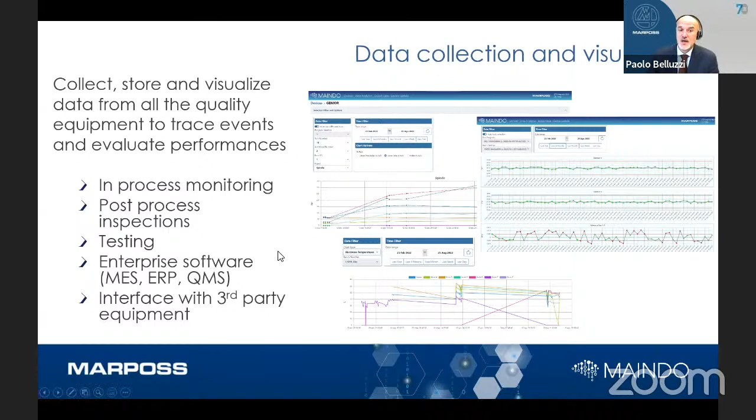I mentioned the key point of all these platforms, that is the possibility to discover hidden relationships between the various steps of the production. Because of course it is mandatory nowadays to have the most optimized production in place. And if you spotted, for example, that measurements taken at the very early stage of the production, even if within the limits, can create some problem after the assembly with other components, at the leak test, for example, that is the final step after the assembly of all the components, you see that there is a correlation between some measurement at the beginning and the fail at the very end.

Having all this information available can give you the opportunity to stop production and not waste time and money putting components through all the other steps, components that will end up with some problem at the very end. So cross correlation and prediction on the process is a key point in order to improve your own production.

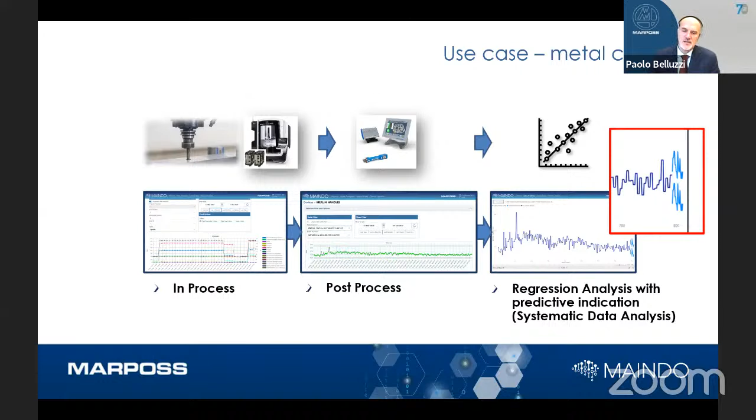We can make what is called a regression analysis in order to understand ideally what will be the next size of the bore that the machine is drilling in this specific moment. So try to predict what is the size of the bore. Of course, with a tolerance, as you can see from the two light blue lines. But by the way, this is just an example.

Usually when we start talking about collecting data, saving data, cloud, everyone is asking or is a bit concerned about the security of this data. But I want to reassure everyone, because in reality, cloud is one of the options. There will be exactly the same possibility of having just an on-premise solution, so a central database which you can access only from inside your company, or even a hybrid solution mixing on-premise and cloud.

What is really, really important is collecting data and saving it in one single place. Of course, the cloud solution is definitely the better solution for all the companies that have geographically spread production, because it will give them the possibility to connect all this data and look at all the production sites from one single place.